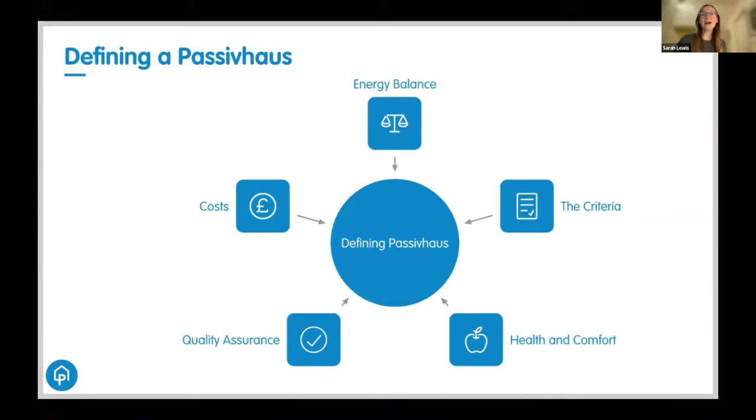So let's get started. First of all, Passivhaus. Passivhaus is a leading international low energy build standard. And I'm just going to pull out a couple of these elements up on the screen just to give you an idea of the breadth of the standard. So focusing on energy balance first. To explain, on the left is the active approach to coffee making, and on the right is the passive approach. So a typical building is much like a hot plate coffee machine.

With the uninsulated glass jug, you lose loads of energy continuously, in a building through the walls, the floor, the roof and the windows. So lots of active heating is then needed to keep that building comfortable. And a passive building, by contrast, is much more like your thermos. The heat loss is reduced to an absolute minimum, meaning that there's only very little additional heat then required to maintain a comfortable temperature.

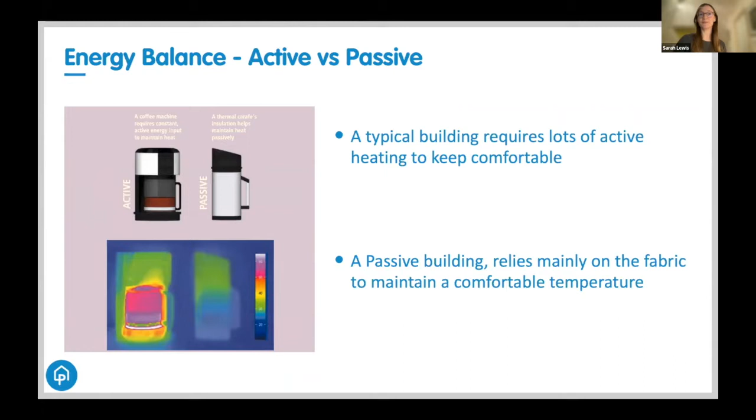Okay, so the next 2 slides are going to compare a traditional, typical new build home with a passive house home. So this chart shows you the energy losses on the left through the building fabric and the gains on the right in a typical building regulation home.

So in a moment, I'm going to compare that, as I said, to the passive house version. But here you can see that even with the solar gains and the internal gains on the right, so that's the little kind of brown and green bits, the home's heating system, the bit in pink, has to do a huge amount of work just to balance all the losses that the building's experiencing through the fabric.

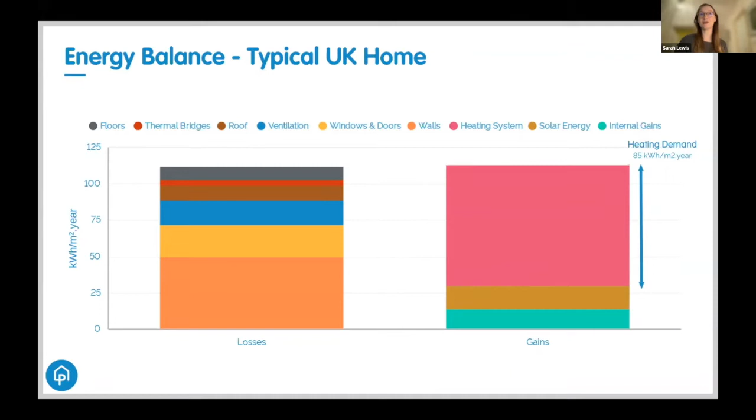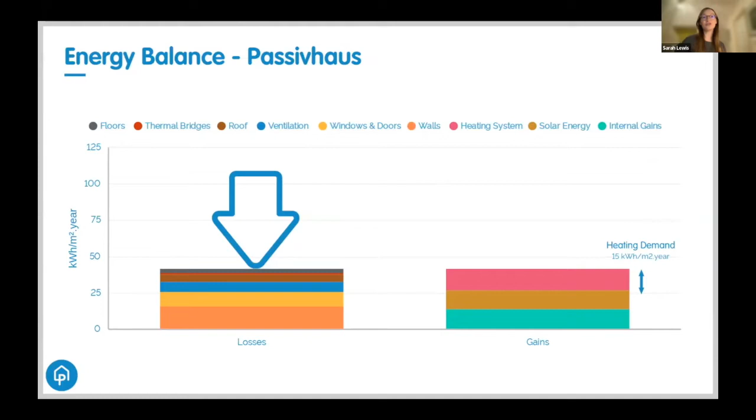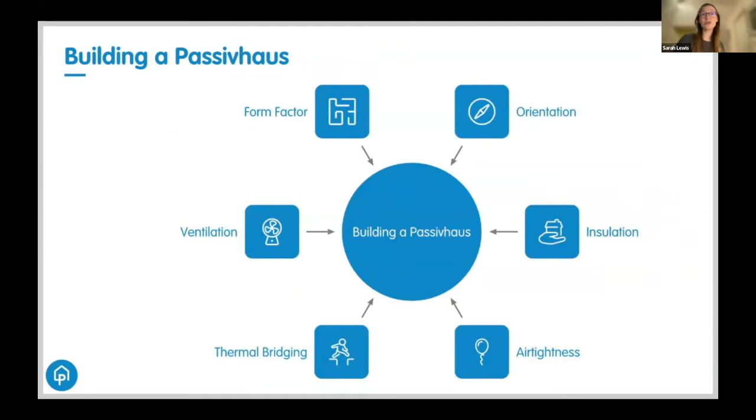So the fundamental principle of a passive house is to reduce those losses so significantly that the building's heating demand can largely be met by the sun, the people, and the internal equipment you have in your house. And then you just need this really small contribution from the heating system. And a passive house is not actually asking us to radically rethink how we construct buildings, but it's requiring us to do what we already do, but do it with much better quality control throughout the design process and the construction stages, eliminating the performance gap in the process.

And as a result, you end up with a much more comfortable building throughout the year with spaces which are healthy to be in. And when we look at the alternative scenario, which is common in so many millions of buildings in the UK, where you end up with uncomfortable, unaffordable homes which are pushing people into fuel poverty and creating measurable negative impacts on people's long-term health, passive house really is a bit of a no-brainer.

So passive house can be built out of any material. The standard is not prescriptive about this. And as such, we have an amazing breadth of material examples with many projects built from natural materials. I did put a call out before this presentation on Twitter for people to shout out their favorite natural passive house projects. And it was literally swamped with suggestions. So what I've tried to do is only show one particular project covering a particular material. So if your favorite didn't make the cut and you're on the call tonight, do pop it in the chat and other people can always Google the project.

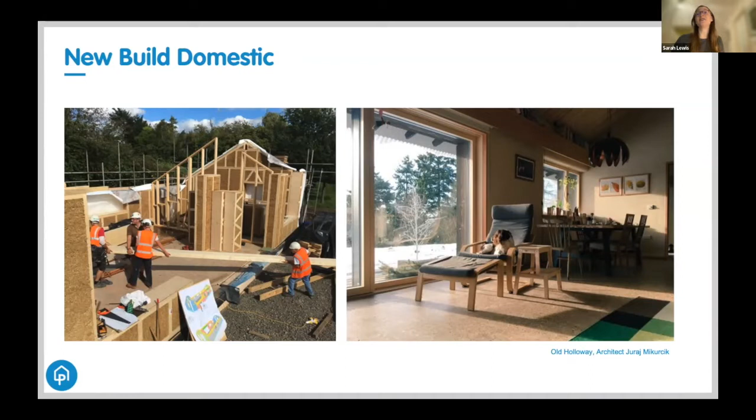So in 2018, the Passivhaus Trust award-winning project was this project by Juraj, which was the first application of this product called EcoCocon, which is a timber straw bale prefab panel system. It's a prefabricated system which is certified as a passive house component, and it allowed for the really rapid and accurate construction of projects. And in this project, the external walls were erected in just 3 days, and the house was watertight in 4 weeks.

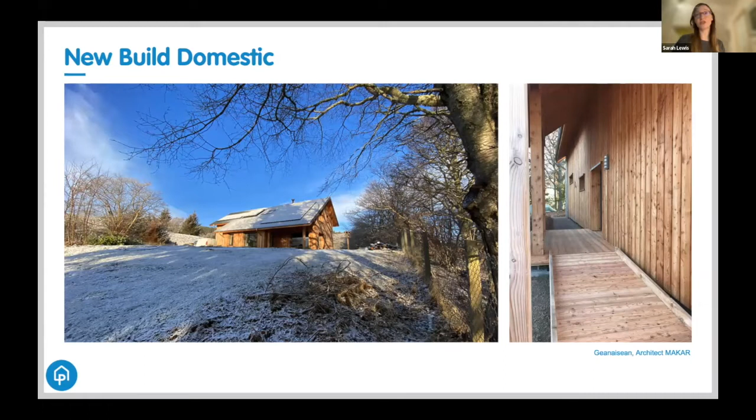And then this project by Makar Architectural Design and Build team is a wooden prefab, which they were basically adjusting their SIP construction system. It uses all natural materials, and it was to create a really replicable model that could make passive house homes built out of natural materials really scalable. So it's a really interesting project, and I recommend you have a look at that one as well.

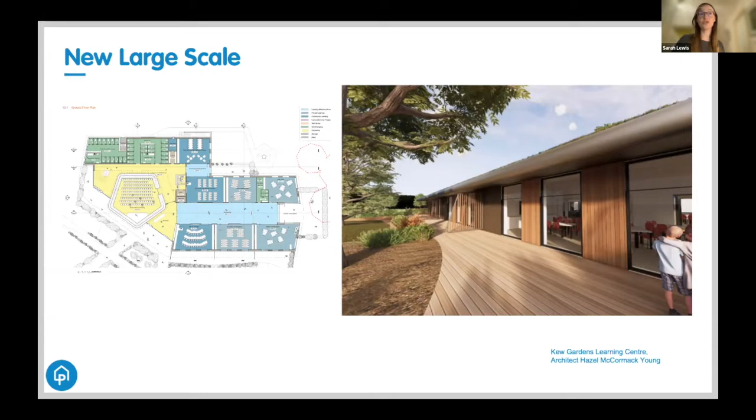So they're using plant-based construction materials in the project, including things like timber, but also mycelium insulation, which is derived from mushroom roots. So that's another interesting one to look out for.

Sorry, I think I'm right on 8 minutes now. I'm just a couple more slides and I'll finish.

And then there's loads of other projects that I don't have time to go into. The Green Building Store have a great variety of retrofit projects looking at different natural materials as insulation and airtightness products. So you can look those up yourselves.

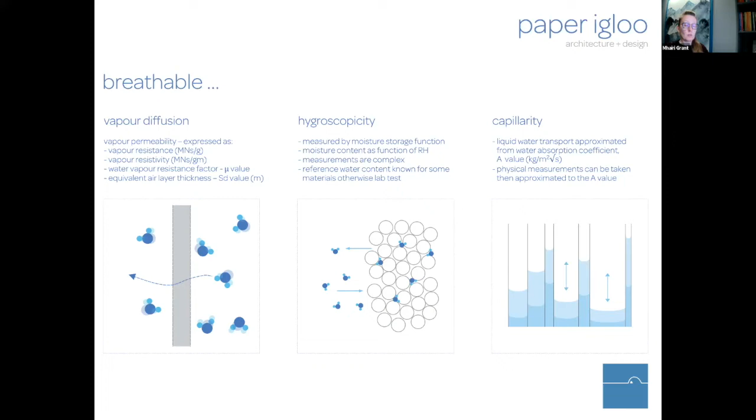Airtightness is a relative term, and as we've described it, in the context of Passivhaus, this doesn't mean our buildings are going to be completely sealed to the external atmosphere. If you think of the building envelope more like a filter, its primary function is to protect us from the elements and to ensure we have a comfortable internal environment, moderating heat, light, air, and moisture, whilst using as little operational energy and embodied carbon as possible to do so. So airtightness is the measure of the resistance to inward or outward air leakage through the building envelope. This infiltration or exfiltration is the uncontrolled leakage of air through cracks, junctions, or other unintended openings, which is driven by differences in air pressure across the building envelope due to both external wind pressure and stack effect.

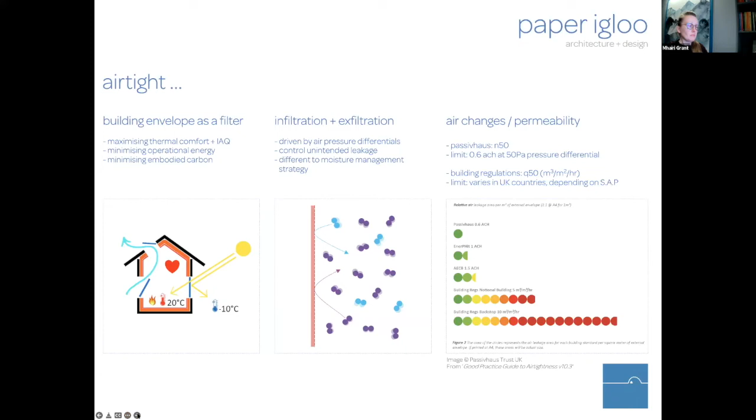However, traditional buildings can also often be drafty. Some modern techniques and the introduction of certain types of impervious insulation materials, cementitious products, and some plastic membranes do the opposite. And many of these are specifically designed to limit or prevent altogether the passage of moisture in both liquid and vapor forms. So when we aim to achieve an airtight envelope, and so to limit the amount of unintended or ad hoc air leakage through the whole construction of the building, we're also limiting the transportation of the moisture and heat that's within that air into the building fabric in order to protect it.

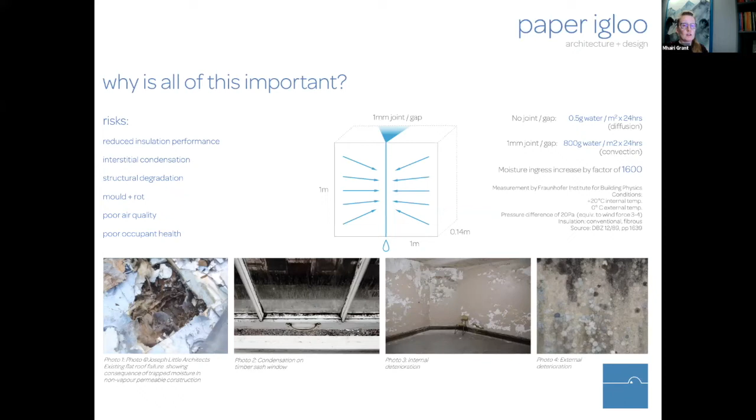So yes, we can have a building that's both capable of successfully managing moisture and being airtight to Passivhaus levels. I'm sure we're all familiar with the classic woolly jumper versus oilskin jacket analogy, which then concludes with a sophisticated solution of the Gore-Tex jacket, delivering both warmth in the wind and allowing perspiration to escape from your body. In other words, airtightness with moisture management. In buildings, the same principle can be applied with materials that can successfully create an airtight layer and adequately manage moisture.

As it is impossible to eliminate the potential for moisture to enter into or form within building components over the whole life of a building, it's critical that we design construction which, in the event of unforeseen moisture ingress, can allow the building fabric to dry out as quickly as possible. To facilitate this, we need to design the build-up on the warm side of the insulation with a higher vapor resistance compared to that on the cold side, and this helps to allow any moisture that may form within the construction to safely dry to the outside.

But for constructions that have difficulty drying to the outside, we can use membranes that have a variable diffusion resistance. These membranes can have a place in locations such as below warm flat roof constructions with impervious layers on the outside of the construction, or some lightweight constructions where we might experience backwards diffusion, which drives vapor towards the inside of the construction. And due to their variable properties, these types of membranes can also cope with unanticipated moisture intrusion within the build-ups.

If we make a building that can manage any moisture that may arise within the construction and is also airtight, we stand the best chance of reducing energy consumption and costs, creating a healthy indoor internal environment, improving thermal comfort for the building occupants, limiting the possibility of condensation and mold formation, and ultimately delivering a safe and durable construction.

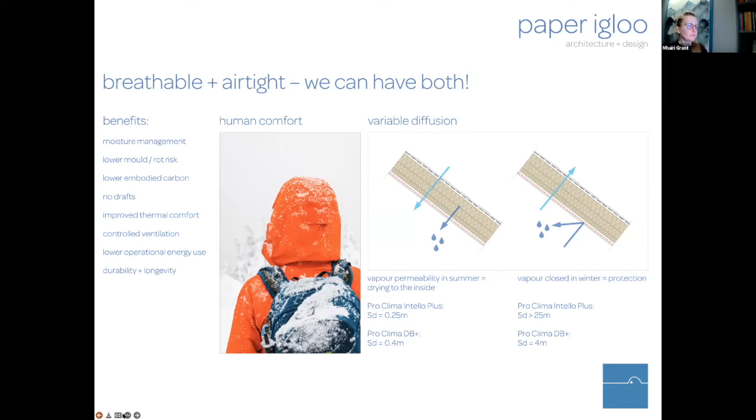So how do we do it? In the context of Passivhaus and natural materials, how do we marry our desire for low carbon materials with Passivhaus performance? There are three main categories of material we can achieve these moisture management and airtight qualities with. We can use membranes on the internal side of our natural material build-ups, and there's at least one paper-based variable diffusion membrane on the market currently, which I've shown here, which also has a matching paper-based airtight tape.

Membranes are advantageous because they are thin and they can be cut and folded easily around other components like joists. But they can be more easily damaged on site than other options, and a lot of them do contain plastics in one way or another.

We can also use boards or sheet materials, and probably one of the most commonly seen is OSB, but there are quite a few other wood-based boards that are from sustainable sources with low formaldehyde and that can achieve a reliable airtight finish. Boards are durable and can also perform a structural purpose, but they are thicker, less easily adapted to difficult shapes in older buildings, and they can conceal issues once they've been installed.

And finally, we can also use plasters, and instead of gypsum-based products, we can use clay or earth or lime-based plasters. Plasters can be advantageous in that they're adaptable to different shapes, such as curved surfaces or curved edges, and they can replace membranes and tapes over large areas. However, it is a wet trade, so that has an impact on sequencing.

And in addition to these internal components, many bio-based natural materials have similar relevant properties that allow us to achieve adequate moisture management throughout the whole construction. Materials such as straw, natural fibers like wood, jute, hemp, and cellulose, building blocks like clay or hemp, and so on, can all help to manage moisture and also protect from the risk of interstitial condensation by allowing vapor to pass through them. And many of these materials are also hygroscopic or capillary open with a high drying potential.

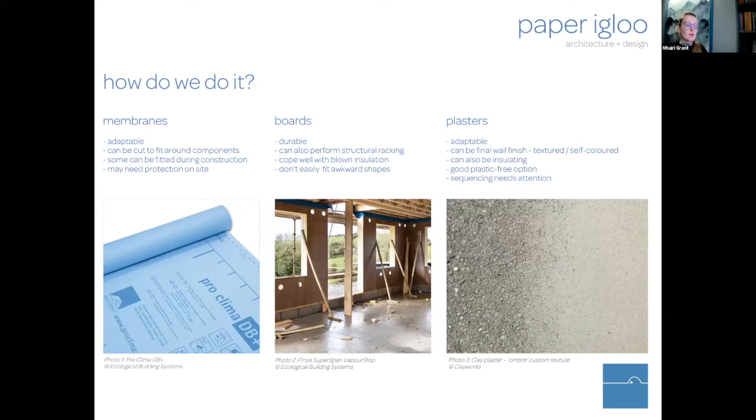So finally, I just thought I'd show some images from the construction of my own Passivhaus home, which my husband and I built, which was a twin wall timber frame with wood fibre insulation. So these photos show some of the sequence of the frame building and the hand-placed wood fibre batts going into the walls, the external layer of rigid wood fibre, as well as the unfinished timber cladding. This building has an airtightness of 0.2 air changes and is a really comfortable and stable internal environment.

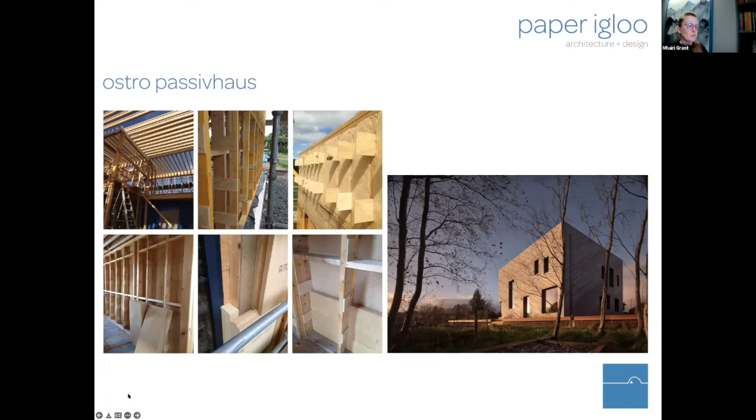Natural building materials and systems are eminently capable of achieving the Passivhaus standard, and they also have other wide-reaching benefits such as circularity, low embodied carbon, better occupant health, and they can be used to create regenerative design.

Thanks very much. I hope I didn't take too long there. No, you definitely didn't take too long, Mhairi. That was incredibly informative. And I think I will be going back and watching the recording. So thank you very much. That was really interesting and so much information. And the diagrams are brilliant. Thank you very much. Thanks. I hope I didn't speak too quickly as well.

No, it's great. So just moving on to, as Barry kind of mentioned, the health and well-being dimension of Passivhauses, I'm going to introduce Sam Foster. So Sam's an architect with a strong interest in beautiful, low-energy architecture constructed from non-toxic materials to create healthy environments. Sam qualified in 2005, and after working with leading ecological practice Gaia Architects, he ran his own practice between 2011 and 2020. Sam has worked as research assistant at Robert Gordon University and associate professor in architecture at Heriot-Watt University. He's now a part-time development officer with Rural Housing Scotland and a part-time labourer at Scottish Wood. So can I introduce Sam, whose myth is: is a passive house always healthy?

Thank you very much, Steph. Let me just do this with the presentation. Does that look okay? Brilliant, thanks very much. Hi, Steph and Barry, thanks very much for asking me to come along and contribute to the event this evening.

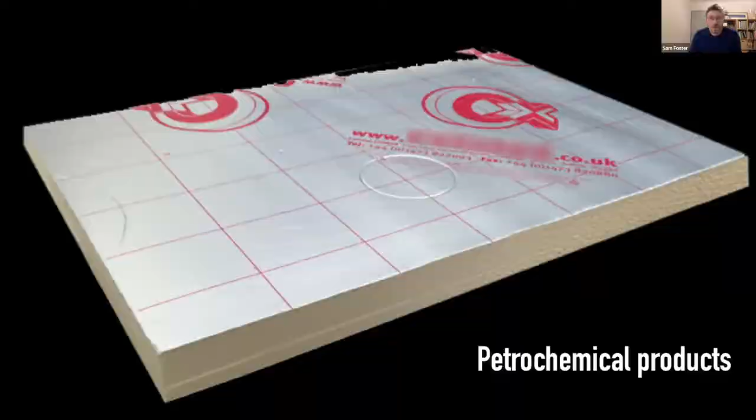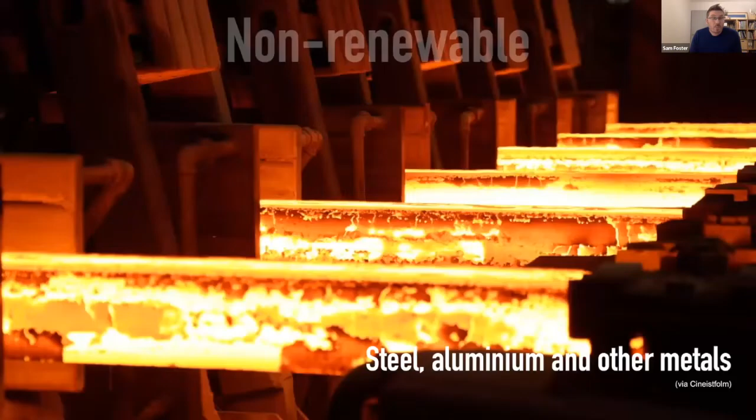We need to move from using toxic materials to using materials and components that are made from natural, non-toxic ingredients and that are good for us and the planet. So that means moving away from things like this and anything made from fossil fuels. It means reducing our use of things like concrete and sand, everything which is extractive, things like highly glued timber boards, and even gypsum plaster has a major environmental impact. We need to move away from using so much steel as well. Steel is much more recyclable than other materials, but we do need to reduce how much we use and move towards renewable materials.

Because with the exception of sand, all of those things that I've just mentioned are fairly toxic. Some of them are incredibly toxic. There's 350,000 chemicals on the market today. A lot of those are used in building materials and internal finishes. And if you go onto a manufacturer's website, you can generally download a material safety data sheet that tells you what's inside that component, that material that you've got. Except manufacturers don't have to tell you all of the ingredients. Through copyright, they're allowed to withhold the information on some of those chemicals.

The result is that buildings are being built from synthetic materials which off-gas significant quantities of different chemicals into the indoor environment. And we, as the occupants of these buildings, are exposed to a chemical cocktail of synthetic ingredients. And there's nothing we can do about it unless we use natural materials. Our human physiologies have been developed over, I don't know how many, 100,000 years, 200,000 years, 500,000 years. These chemicals that we're exposed to have only been in existence for the last 60 or 70 years, and we are just not equipped to deal with them. And that's partly why there are increases in cancer, for example.

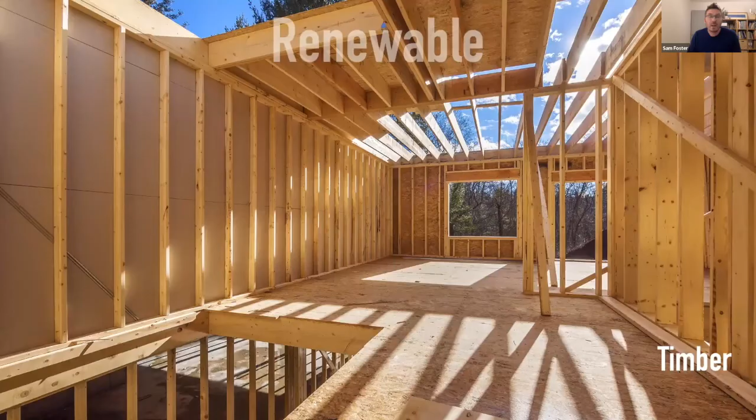So this is what we need to do. We need to move from these synthetic non-renewable materials to renewable materials like timber, homegrown, untreated timber. And we've got a fair amount of that in the UK. Not as much as places like Sweden, Germany and Austria, but we've got a fair amount. And the more we use and the better we use it, the better will be the replanting of the species that we replace them with. Everyone's used to seeing timber frame. That's a good thing. A lot of you will be used to seeing massive timber like Brettstapel or cross-laminated timber and wood fibre.

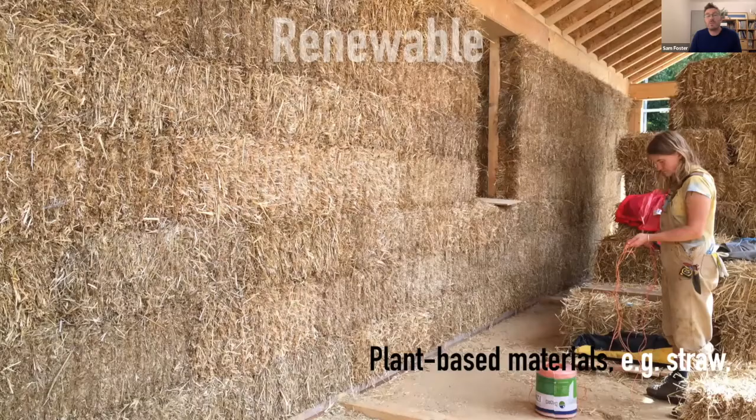And we've had some really nice examples. We have seen passive house projects built from rammed earth. We've seen straw bale houses. And we saw a lovely example of George's EcoCocon project earlier on with the prefabricated straw bale panels. But there's hemp and hempcrete, and people are building passive houses out of this and then insulating parts of their buildings with jute and sisal and plant-based materials.

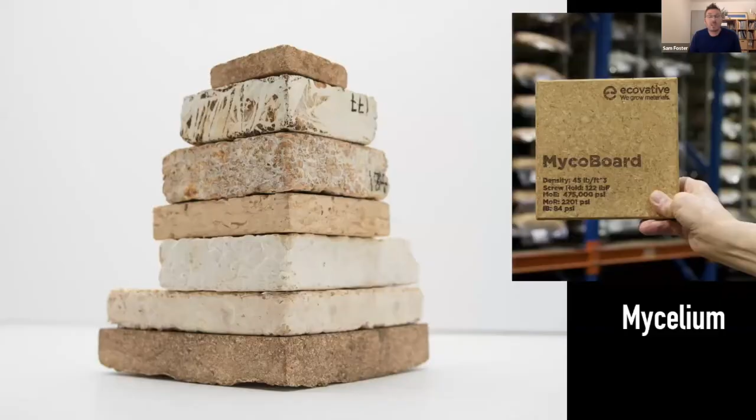But there are also really interesting materials like cork. And this fantastic project down south, I say down south because I'm up in Scotland. This fantastic project down south was built almost entirely from cork, apart from a bit of cross-laminated timber. And Sarah earlier on mentioned the use of mycelium in the project at Kew Gardens. And mycelium is becoming a really common material for boards and for insulation products.

All of those things I've quickly rattled through are non-toxic. Fair enough, there's a little bit of glue in cross-laminated timber, but it's a very, very tiny proportion. It's nowhere near the amount of petrochemical product or chemical products used in PIR insulation, for example.

We also have to really think seriously about our internal finishes too. And that's not just the flooring and the walls and the paints, but it's things like our internal furniture as well. So when we're developing our strategy for our construction, it's the internal finishes that tend to off-gas most into the indoor environment. So what we finish off our buildings with is really important.

Now, a couple of things that I haven't mentioned, which I'll mention very briefly, are solid floors. So I tended to use limecrete and foam glass or LECA, which aren't plant-based and aren't renewable, but have much lower embodied energy and toxicity than concrete and plastic insulations.

So benefits, let's quickly run through those. Yeah, there's quite a few benefits of moving to natural materials, aren't there? They've got lower embodied energy and CO2, which means less pollution is created. The waste from natural materials tends to be compostable. I did a straw bale house a few years ago, and the occupants spread the remaining construction modules of straw bales on their garden. Natural materials are made of fewer materials, which means they're easier to take apart usually and recycle or reprocess at the end of their life.